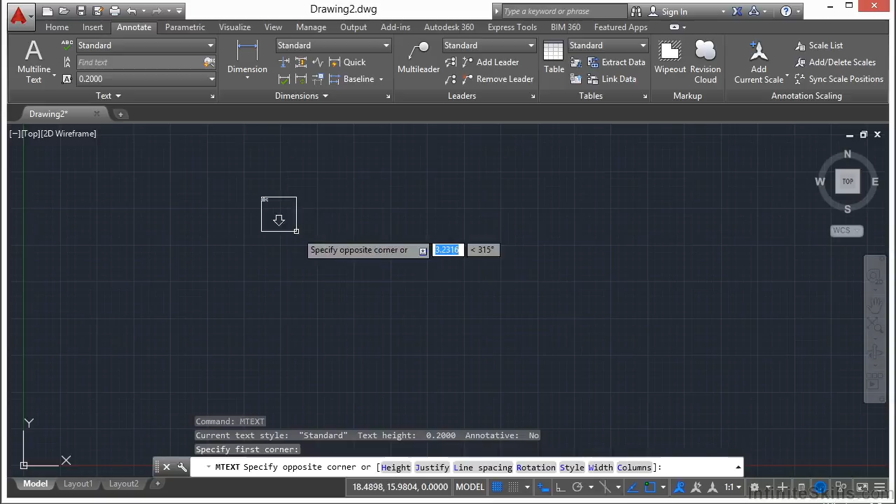So we're just going to start the M-text command. We're going to get our text editor, and then we're going to right-click, go to Import Text, browse to the folder that has your files in it. Go to this chapter's folder, and let's load in the note-pipe.txt file. Select that and click Open.

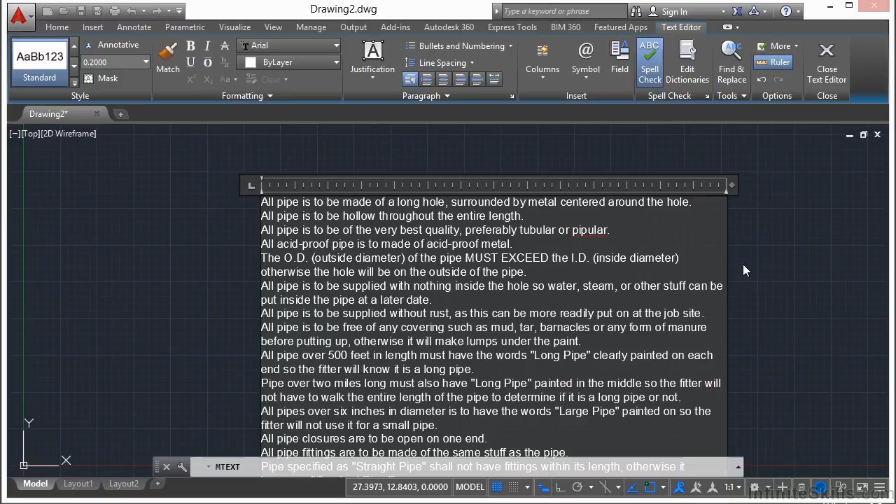Okay, now we have a lot of text in here. That's a quick way to insert text into your drawing, especially if it's a set of notes that you're going to use over and over again. It has to be saved as a .txt file, whatever it is.

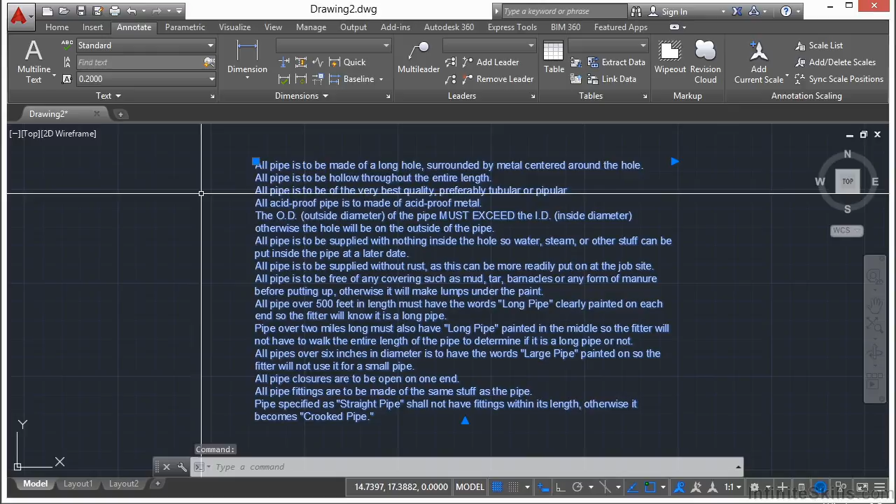So just remember that. Now that I have some text in here and I have a style set up for them, it's using the standard style. If I open up the Properties palette, I can confirm that. Yes, it's the standard style. So if I open up my style manager and go to standard, I can change the font type to whatever I want. Click apply, click close, and that text object is updated.

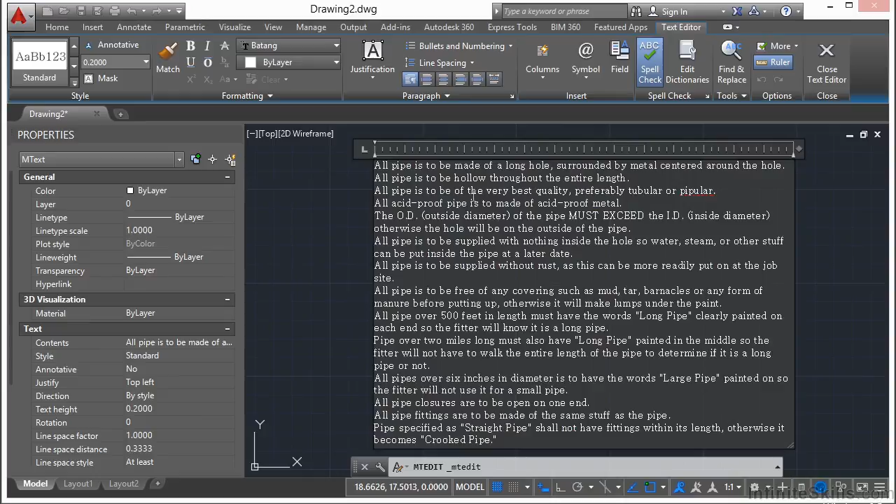But if I double click the text to edit it, let's say I select these first couple of lines, I'm going to go bold, italics. I'm just going to give you a big idea of what it's going to look like. I'm going to make it very different.

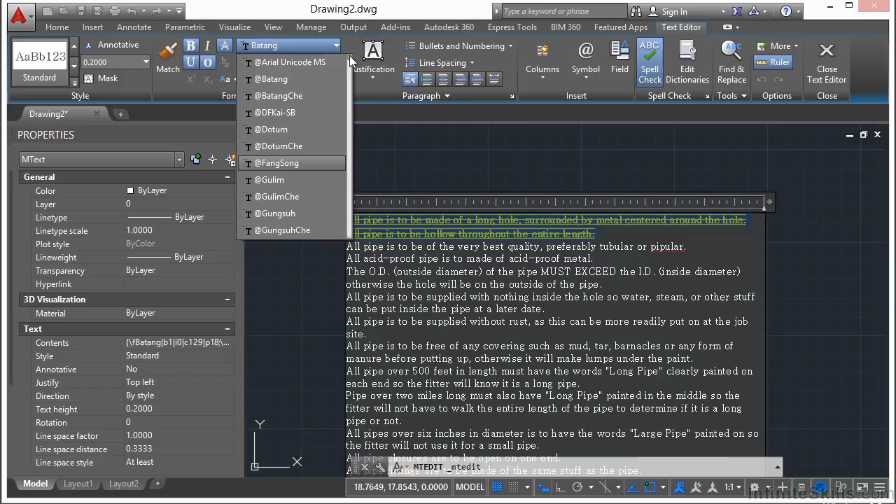Actually, let's make it yellow. And I'd like to also change the font. So I'm going to select it, go up here to the fonts, and put this one back to a different Arial font. Okay, now that I'm finished, you can see these look very different.

And I used the text style overrides within the text editor. Similar to how you would change a line's color or line type through the Properties panel, you can do that too here with the text, and that's fine.

But now when I select this object here and try to change it to a different style, I can't, because of the overrides—it kind of breaks that style relationship that it has. So it's suggested that if you need to change the font of a text or the color, manage those visual displays through the Properties Manager, Layers, and Text Styles. Make multiple text styles; they're very easy to make.

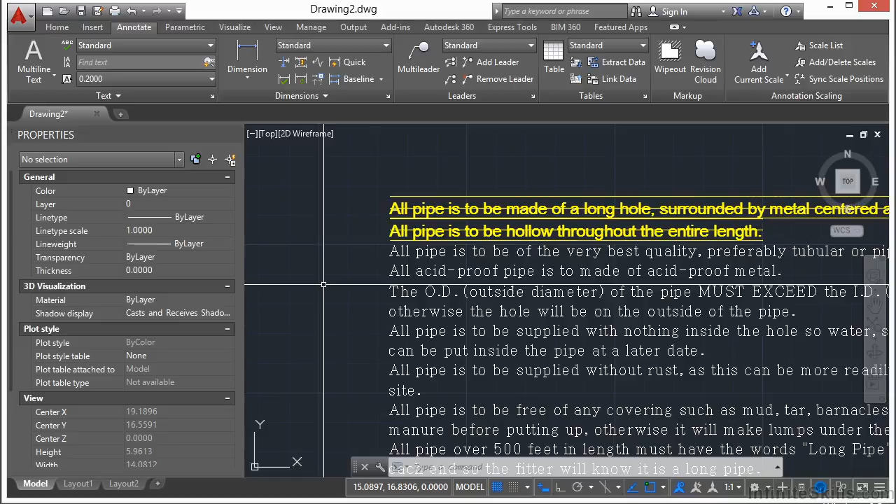Now, M-text can have a background mask applied to it. This will block out any line work that's behind the text. This allows the text to be seen more easily over line work.

So if I have a series of lines, and you want them to be blocked out so that your text sort of sits on top of it and you can't see it, that's easy enough to do. Select your text, go to the Properties palette, and scroll down till you find Background Mask. Right now it's turned on to No. Select it and click this box and pick on the Use Background Mask.

Now we want this to be at least 100% of the coverage of it. I typically go with a 1.1, so it gets out just past the edge of the text, so there's a little blank spot around it, just in case. Now instead of picking a color, choose the Use Drawing Background Color. Click OK. Press Escape.

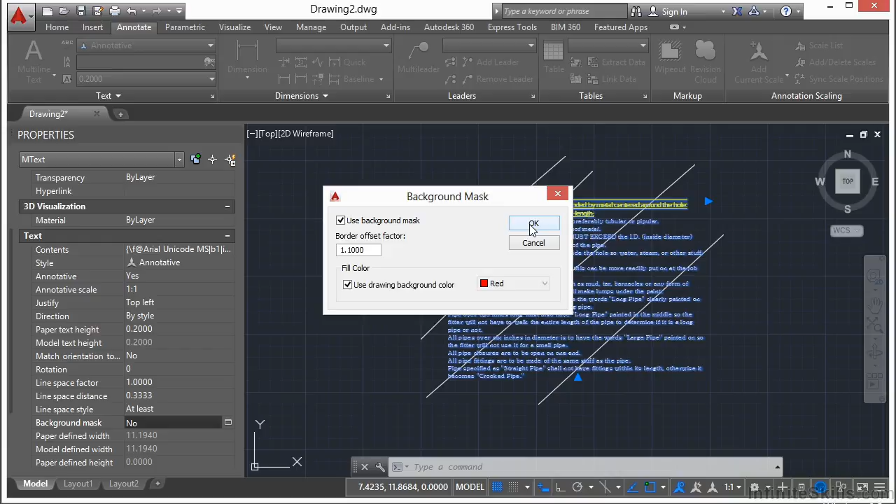And your text has to be on top of your line work. So you can select it, type in DR for draw order, press F for front, and your text will be on top of that. Your line work is still there, as you can see, but it's just being blocked out so that you can read the text more easily. So that's a nice little trick.

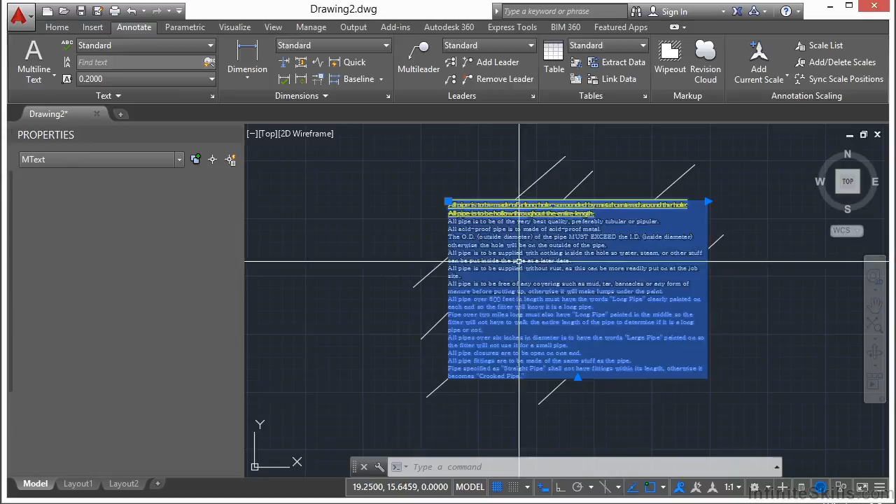Also, when you're in the text editor editing your text, if you right-click, you get access to a lot of different options. Many of them are available up here in the ribbon. You can get to select all, cut and copy, paste special, insert a field, access a lot of different symbols, the import text option as I showed you earlier, alignments, bullet lists, set up columns, find and replace, change case—which is very nice—all caps, which will change everything to all caps if that's the way you have to type, autocorrect, caps lock on, different character sets, your background mask, your editor settings, help, and cancel.

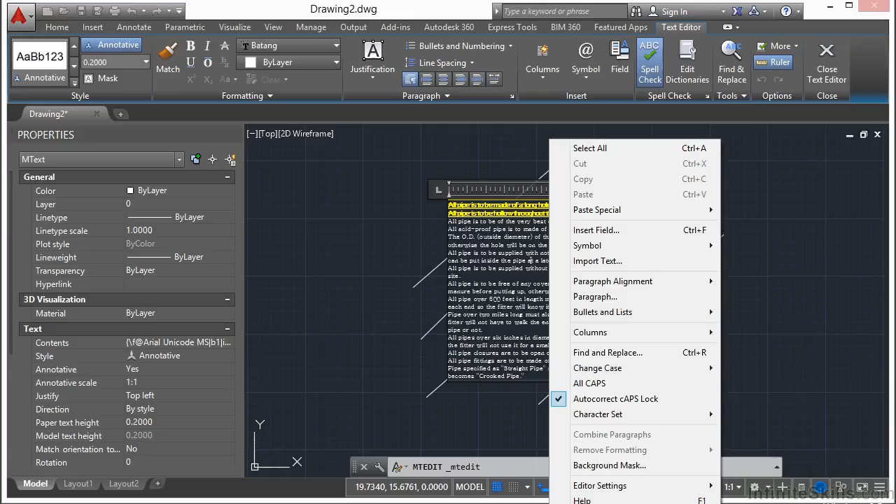So you can see you can get to a lot of different tools and a lot of different ways that make multi-line text inside AutoCAD almost like a word processor.